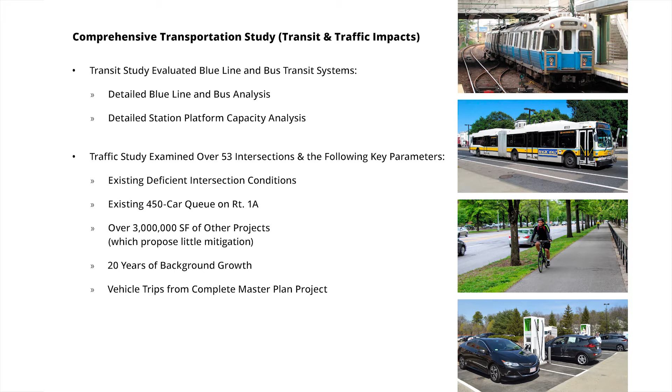All right, getting to the punchline, I'll go through more detail. On the blue line capacity, we studied the most congested part of the corridor between Maverick Station and Aquarium. There's really no point studying Suffolk Downs Station because there's plenty of capacity there—we're more towards the end of the line. So we studied the pinch point. We are within MBTA policy capacity, and well below MBTA crush capacity.

I'll show you, we have some diagrams for that. What we're saying is that we're able to put background growth and all of our passenger trips onto the blue line station and still operate well within policy capacity, or close to it. Remember, half our trips are almost reverse commuter trips too, so that's really good. The orange and red line, typically in peak hour, always operate at crush capacity, if not touching the upper limit. So the blue line's in really good shape.

We're adding a lot of new revenue to the MBTA system without requiring them to put—as we've talked about before—they have a 14 fleet system, but only 12 cars, or 12 train sets, are in service. We add the new revenue without forcing them to put the other 2 train sets into service too. So that's a really good thing for the MBTA—a very net positive for them in the early days.

And obviously we did the platform capacity analysis, so there is sufficient platform capacity both at Beachmont and Suffolk Downs Station, and we'll go through those. As Tom said, we're proposing over $50 million in off-site traffic mitigation measures.

30 intersections are being improved. Some of them are major overhauls, some are more minor updates, but 30 total. The biggest one, as we talked about before, is the Route 1A corridor. It says between Boardman and Winthrop, but it actually goes much farther south than Boardman—it's the approach to Boardman.

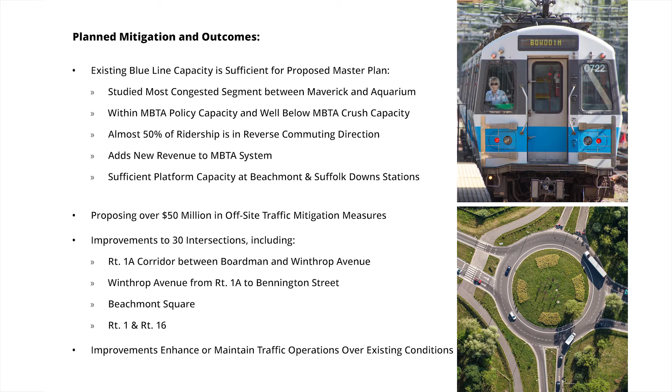So these are other improvements. Just a reminder, our on-site improvements are trying to encourage non-vehicular modes of travel. We showed this slide before, we'll show it again tonight. We're adding almost 5.7 miles of new bicycle facilities just within our site — our cycle track network, our bicycle lanes — and we're talking about at least five new Blue Bike stations spread across the site.

We have two on-site shuttle routes. We're talking about four or five different shuttles that go to places like North Station, the Seaport District, South Station, as well as the commuter rail station in Chelsea. And obviously the extensive on-site community paths and pedestrian ways. Our goal is that we actually do want to push people to the Blue Line — it has capacity, it's the best thing to do, and it reduces traffic. So that's the punchline.

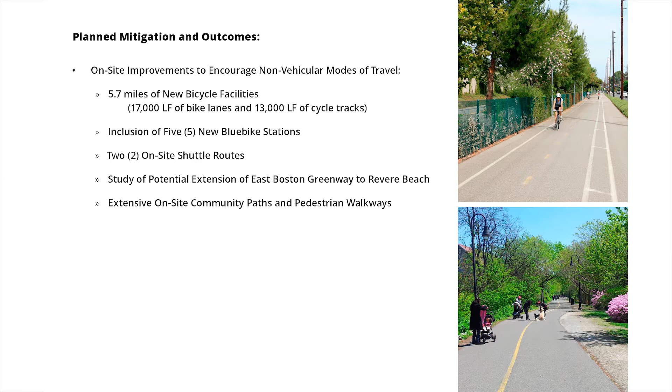So if I go forward — come on, this clicker doesn't like me. There we go.

So again, this is the master plan that you guys have seen — this is just the Revere portion. Now I'm getting back into the details. I might switch sides, I don't know. Come on.

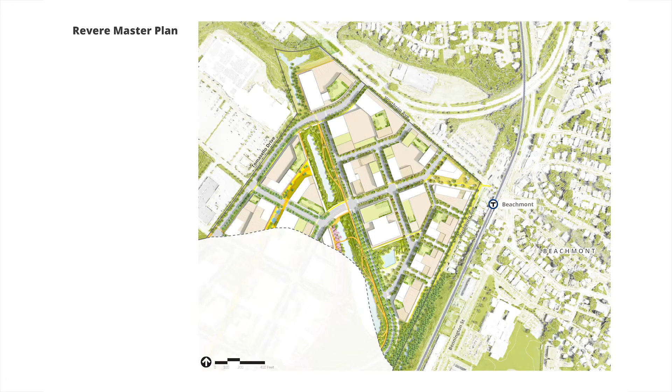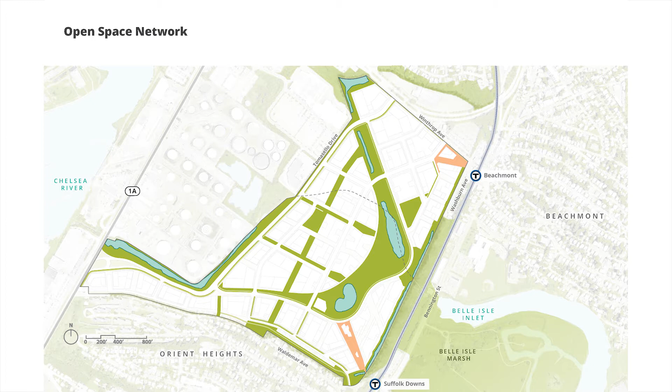So again, I'm showing you the open space system — the only reason is because our on-site roadway network was really formed around the open space system. When we designed this site, we really designed it around the 40 acres of open space system. So here's the roadway network.

Except for portions of Tomasello Drive, which exists today — and some of them, by the way, are not roads, they're just simply asphalt paving that's like 100 feet wide — everything else we have to create on our site. So this whole roadway network is being built by us, and all the utility network is being built by us. As part of the $220 million, we have $110 million worth of on-site costs just to build this out. It's a huge amount of money.

These are really public streets, or public right-of-ways. City of Revere — we're also maintaining these for the City of Revere into the future as well. So a very important point. But here's our roadway network.

Obviously, we're talking about full signalization at Boardman, Tomasello, and Route 1A. It's not on this plan, but we're also talking about full signalization at Furlong Drive and Route 1A. The idea is that our basic concept is to try to shift the traffic back to where it should be, which is on Route 1A.

Doug, before you move from this — it might be worth noting that Tomasello Drive is transferred for virtually its entire alignment, not just at the Winthrop Avenue section. Correct, yeah.

So today, Tomasello actually is more midpoint here — it dives in, and then it comes back to the store, and then goes through here. So the only segment that remains in its current location is here. And that road varies from two lanes in each direction to — well, the width of two lanes, but just wide pavement. But we'll be reconstructing Tomasello really into a city standard street, because today most of it's not city standard — it's just basically paved, goes off into parking lots, or there's Jersey barriers or blocks.

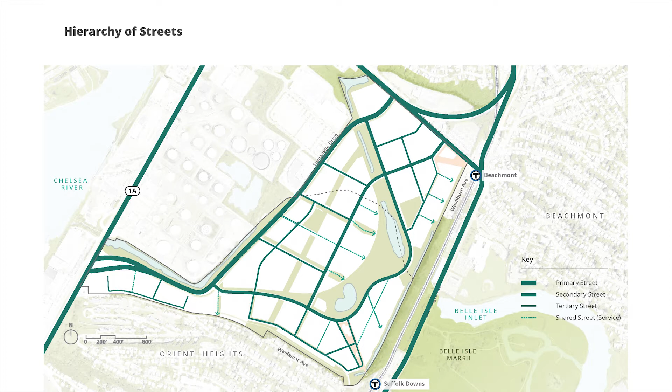So, bicycle network - we talked about this before, but it's still important. The dark blue is the cycle track network, which is a raised two-way cycle path that is not on the street, but up on the curb level, offset from the street typically 4 to 5 feet. It's meant to run all the way through the site, all the way through the park.

We have a new one on Winthrop Avenue, and we purposely connect it back to Walley Street, so it's a very extensive cycle track network. And then you also have the more traditional bike lanes, which are shown in light blue.

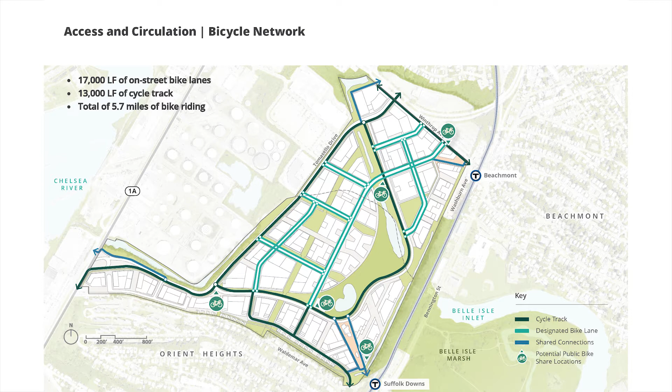You're also seeing the 5 locations of Blue Bikes - we used to call them Hubway, but now Blue Cross Blue Shield owns them, so they're Blue Bikes. They'll probably be Google Bikes in 5 years. There's no host agreement right now with the City of Revere on the Blue Bikes, but we hope there would be. The goal is that we're willing to put them anywhere on the site, and we're open to other dockless bike stations as well.

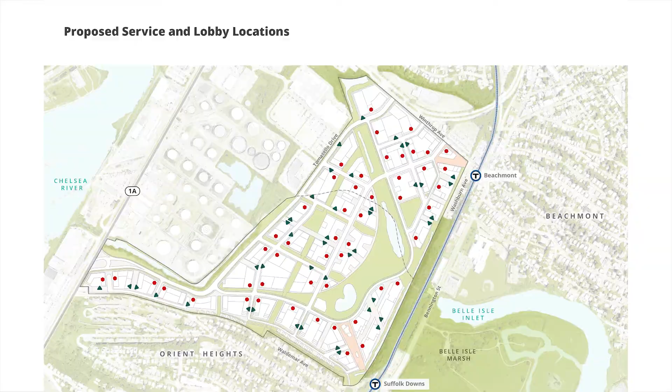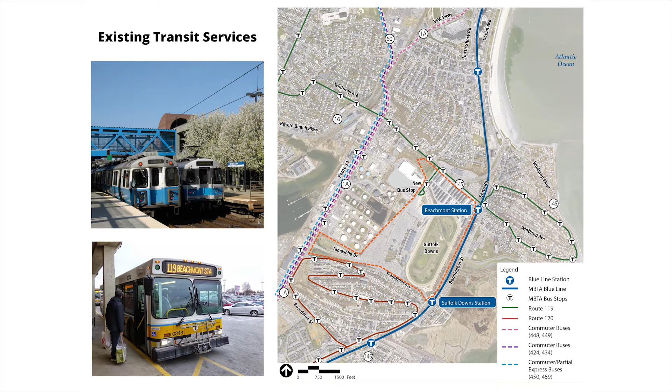One of the things we're working with the MBTA on - as our site gets built out, we'll work with the MBTA and the City of Revere, because that 119 bus may take a further ride into the site and loop back out. For now, the only way in and out is Tomasello, so we have that turnaround there as well. As part of our transportation study, we also studied the impacts on the buses, and I'll go through that.

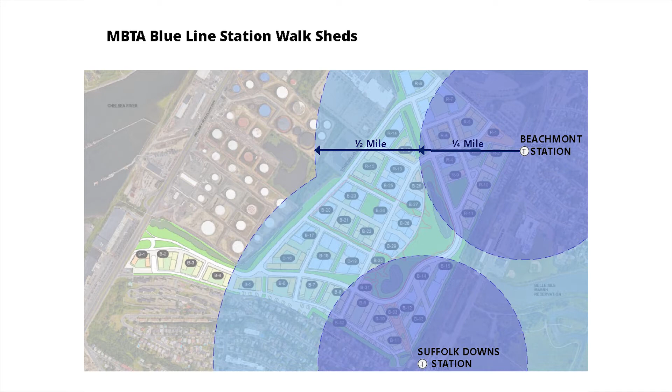Even though we're within walking distance, we're still committed to doing a 2-shuttle route system: an inner shuttle loop and an outer shuttle loop. This is privately maintained and funded by us. We've heard comments from the community about whether they can start making stops off the site too, which is something we'll definitely explore, but we have to think about demand and capacity. Also, the 119 bus does come into the site and leave the site, and the 120 MBTA bus gets really close to our site on the Orient Heights side, so that's a key item.

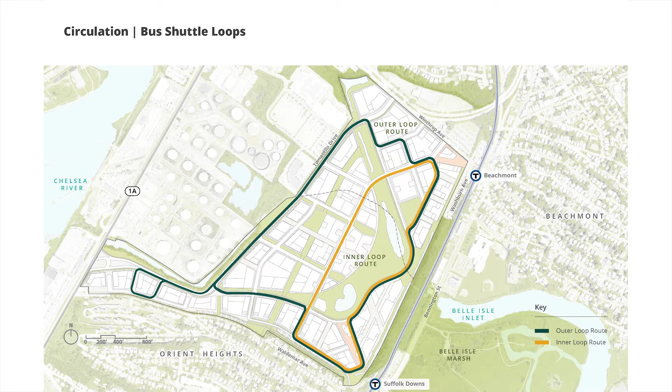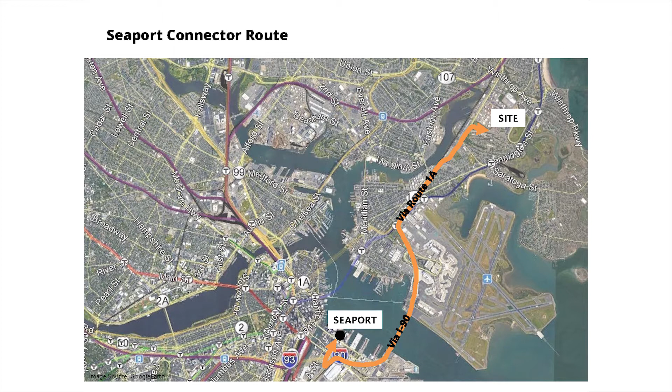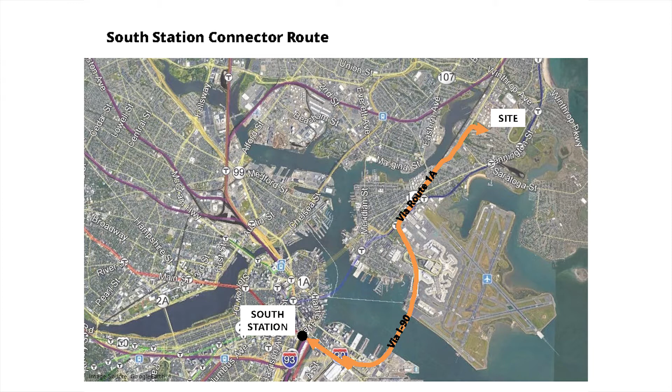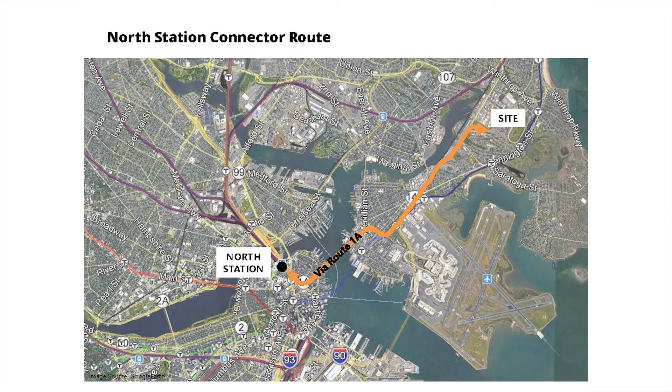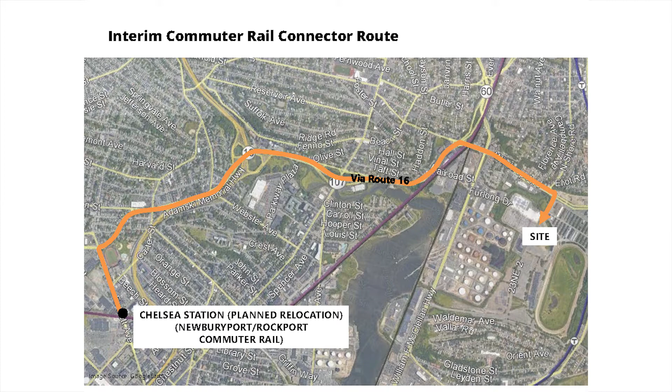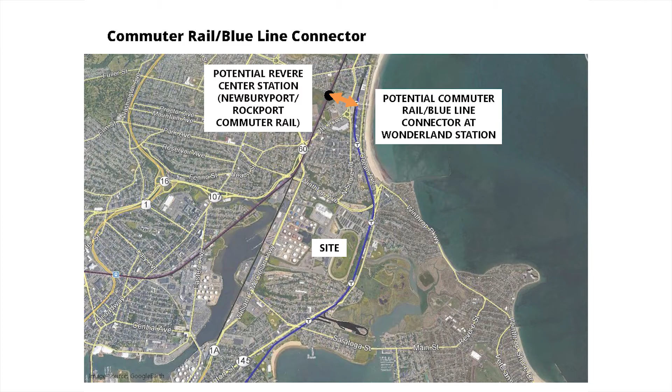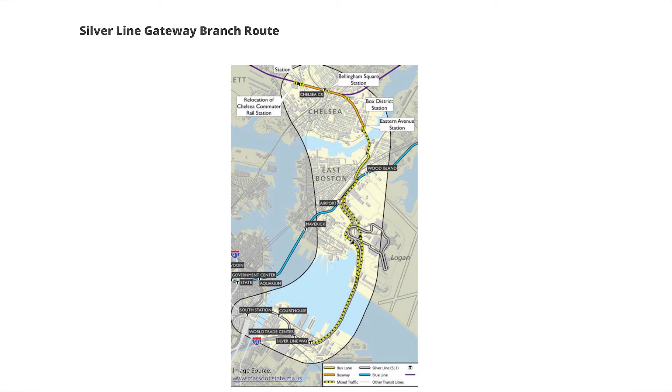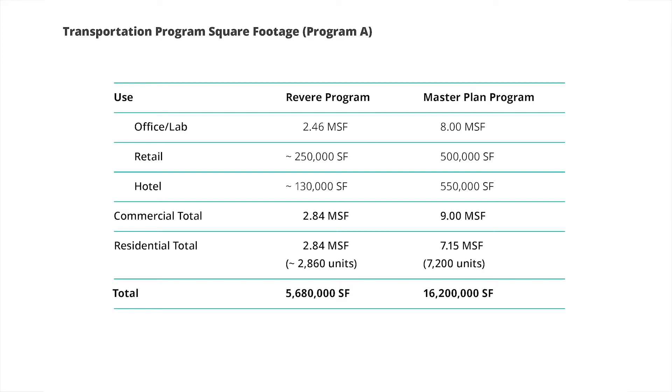So what was the transportation study based upon? I think it's really important to note that we based it upon Program A, the office-intensive program, which generates more vehicular trips than residential. Remember, we had Program A and Program B. Program A was like the Amazon-type program: 8 million square feet of office and lab, 7 million square feet of residential, 500,000 square feet of retail and hotel. Program B was more commercial, only 5.5 million square feet, with residential up to 10,000 units. For the traffic study, we used the more intensive office program, so it's meant to be conservative.

As Tom mentioned, we've been working in detail with MassDOT and MEPA, and they asked us to run the study first using their regional model called CTPS. MassDOT holds this big regional model covering basically everything 495 and in - it's a huge, very car-centric model. In fact, we think it's a very conservative model - I'll look at John, but we have trouble with this model. Still, MassDOT asked us to run it, and the reason I'm pointing it out is that it suggests public transit usage in peak hours is only 25%. That's a shockingly low number for a transit-oriented development site, especially when East Boston is at 50% today. But we still ran it that way.

We also worked with MassDOT to come up with transit-oriented development parameters, so we ran a second model. The reason was twofold: the MBTA was concerned this 25% number was too low to analyze impacts on their system, and we were concerned too. So we ran it with 39% public transit, which is more in keeping with sites like Assembly Row or North Point, more transit-oriented developments. We also looked at other precedents in DC. So you have 2 programs, and the good news - besides our time and John's time - is that you get the worst case of both worlds: the worst case traffic solution and the worst case transit solution. We studied both, and we'll go through those, which I think is really important.

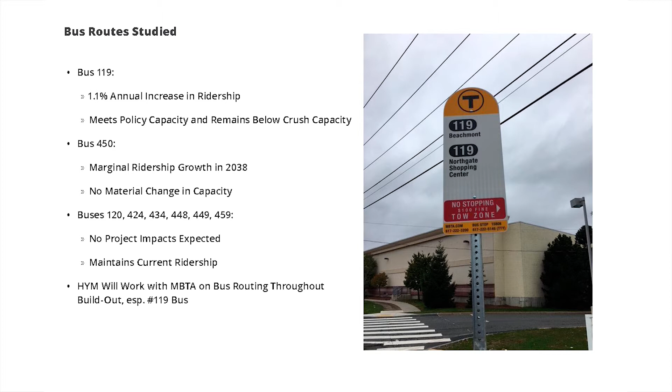And I'm not joking, when we did the Government Center Garage with VHB, the orange line is running consistently well up into the crush capacity during peak hours, and the red line too. That's why they're trying to get new cars to try to bring that down, and new signaling.

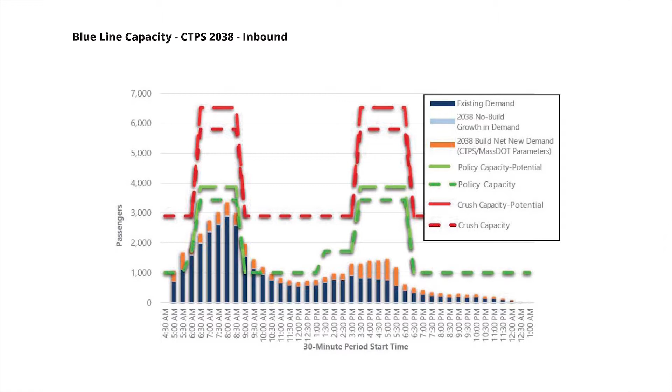And again, this is on the CTPS, so this is less transit riders. That's inbound. Outbound - again, this also shows you the dramatic reverse commute type thing that we have going on. But again, you can see we're well below the policy.

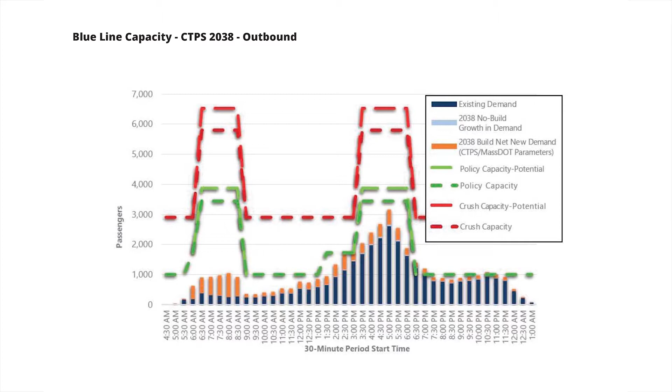Now, when we go to our TOD parameters, you're going to see a jump. So there's the TOD parameters - you do see a jump, and we're starting to get a couple bars that just get over in a 30-minute segment right over that policy capacity, still well within crush capacity.

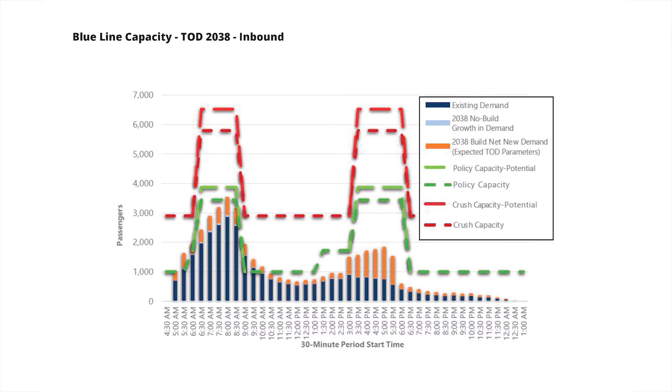And again, you see a little bit bigger jump on the reverse commute. So this, again, is inbound, and here's outbound. That's honestly an amazing story. There's a lot of concerns and questions, particularly in East Boston, because East Boston experiences the Maverick to Aquarium segment pretty intensely. But we thought it was a really incredible outcome.

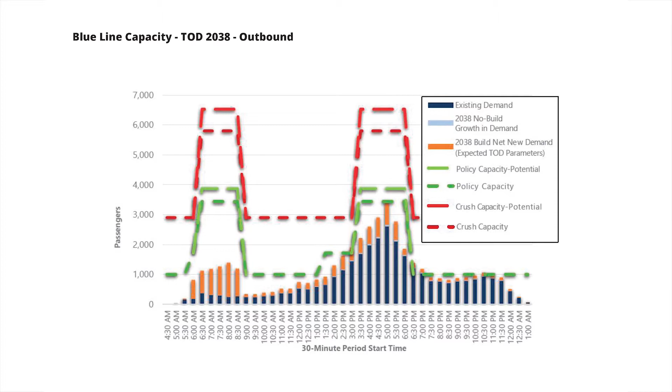And even if we exceed 39% transit ridership, there's still capacity there to be had. So for platform capacity analysis, the platforms were built full length for the trains, so we do not have platform capacity issues either with the CTPS model or with our analysis.

This is not about code changes, though. We're still doing the review of both T stations for code-related upgrades and things like that. So there still will be improvements to these stations. But the answer is that the platforms don't need to be lengthened or expanded.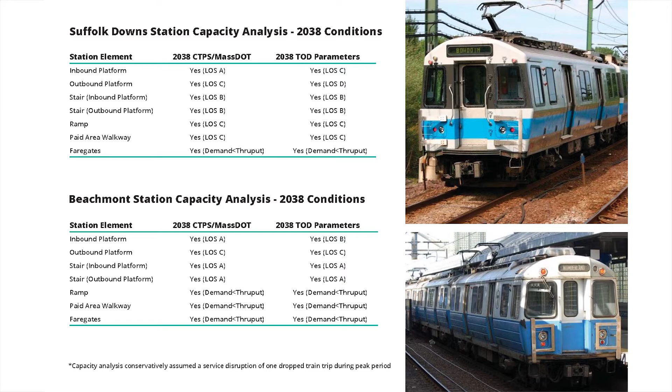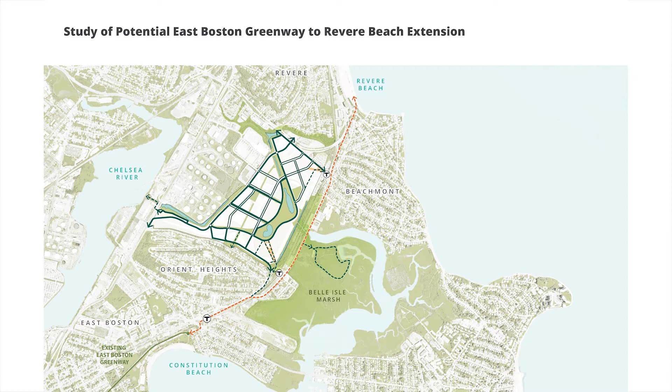So that's really the transportation analysis. The other thing we talked about, which VHB has studied, is kind of bike to the beach - the extension of the East Boston Greenway from Constitution Beach all the way up to Revere Beach. And we did some more detailed studying of that.

Go to the next one. And so the way it looks right now is that here's Constitution Beach. It would really be kind of sidewalk and bicycle connections until we get to Bennington Street. But once we get to Bennington Street, the community path, for the most part, can run in the right-of-way all the way up to Beachmont Square.

And we're doing that partly as a road diet, using the shoulder. But the idea is that we could have a robust community path that gets all the way up to Beachmont Square. It gets a little tight in Beachmont Square - we're actually just talking about this with John today as well, so we're still working how it gets through Beachmont Square. Once we get through Beachmont Square, the idea is to get it up to Elliott.

We obviously know the City of Revere is working on Elliott, so how it wraps around the circle we're still working on. But the good news is that there is very much a viable solution for this Greenway extension to go all the way up. And again, it's more of a regional connector, but it's still very important from our perspective.

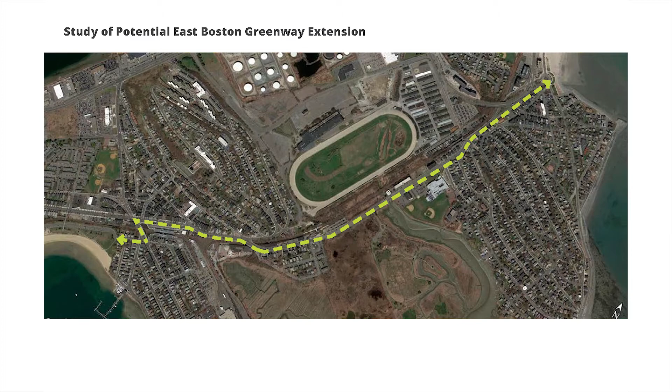All right, so before you get into traffic, maybe we ought to just see if there are any comments or questions on the transit and Greenway issues. You must be very persuasive. Joanne? You can ask questions.

One of the things that Doug had talked about was a 25% transit share during the peak hours. During the rest of the hours, we're at 18.4%, which is very low when you start looking at the East Boston neighborhoods in terms of the 50 to 55% use. So 25% that CTPS has identified was a concession to increase what the model had originally said, but they're still holding us to 18 or 19% daily.

I'll give you the politically correct response we got from some MBTA personnel and planners that we were working with. The answer was, what? That was really their response. So the good news is that they can see the higher demand as well, too.

Oh, sorry, Counselor. Thank you. Will, I don't know if this question was answered, but will the MBTA train stations be responsible for cleaning up their properties? Because right now, Beachmont train station.

That was the MBTA cutting you off, probably. So the answer is, obviously the MBTA should be fully responsible for cleaning their stations. It's something that we can mention to Dina. We can definitely talk to the MBTA about it. These are going to be, just like you guys, this is going to be our front doors. Our MBTA stations want them to be clean. So it's something that we can definitely talk about.

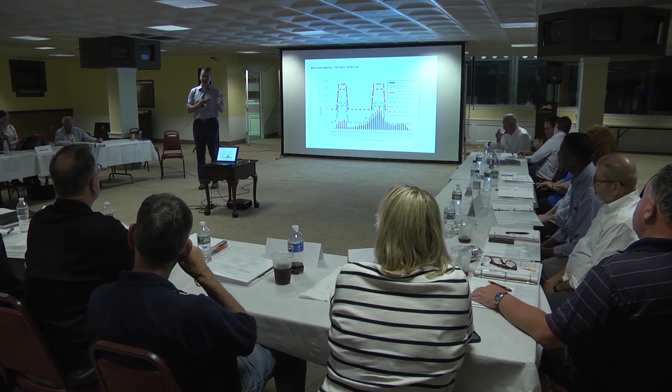This is a relative term. Beachmont's in much better shape than Suffolk Downs Station. Suffolk Downs Station is going to need some real work because it really got passed over, since there wasn't much ridership, so it got skipped. But again, those improvements were still like 15 years ago too.

So, but the answer is yes, we are studying them, and then we'll have to work out with the City of Revere and Boston, as well as the MBTA, what improvements should be done, especially as we build out the site.

Could I ask a question with regard to Suffolk Downs, which is not directly relevant to this discussion, but there's a very long distance along Bennington Street that is kind of impermeable, in part because of the Blue Line tracks. Is there any consideration being given to reconfiguration of Suffolk Downs Station to allow perhaps some intermediate pedestrian crossing, which the station itself could serve, depending on how it's designed?

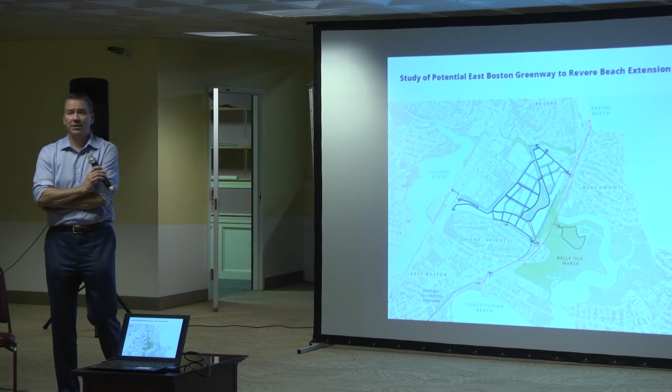Yeah, this has definitely been brought up. I think you can pass over the station without going through the fare gates today. Obviously, that's in very rough shape too - the ramps are spalling and there's things like that. If the MBTA disposes of the parking lot, there may be an opportunity to use a new development to help cross. We did something like this at North Point where we actually used the building and go over a part of our garage to create a new pedestrian pathway. Other than that, it's very challenging, because we talked about this also where Sales Creek crosses under the tracks. The problem is there's no headroom, right? There's not enough room, without scuba diving.

So we have looked at it. The unfortunate part is the amount of infrastructure between us and Bennington Street makes it very difficult. But I do think the goal would be that we definitely don't want to close off the passage that allows people to go up and over the Suffolk Downs T station, because otherwise you have to walk all the way down Walley Street to Bennington to get back over.

So, Ruggles Station, for example, on the Orange Line, I'd be willing to bet you there are more pedestrians that use it between the two portions of the Northeastern campus than transit riders. Yep. So it does serve a pedestrian access issue if there is an opportunity to do that.

No, and again, I think our goal too is that we're going to have residents that are going to want to get to the Belle Isle Marsh or get to Bennington Street sooner, so there are destination points. I think it's something we got to see how the structural conditions come back.

Again, and also, those things from our experience at North Point can be very expensive very fast. And so that's something else that we just need to keep in mind.

Doug, if I could, my first one.

To go back on the T issue that Joanne raised in your response, I guess I want to try and understand, because it sounds like HYM has been having conversations with the T about what needs to be done and trying to convince the T to do the things that they need to do with these stations. Obviously Suffolk Downs is in worse shape than Beachmont, but that doesn't say Beachmont's not in good shape. Yep, correct. So my point in all of this, and the point I've raised before, I guess I'll ask the question - city, state delegation, HYM, working together to put pressure on the T to get these things done. When I look at what happened at Assembly Square and over in Medford and Station Landing, they built 2 new stations. We're asking them to renovate 2 existing stations for a project that's probably just about as big, yeah?

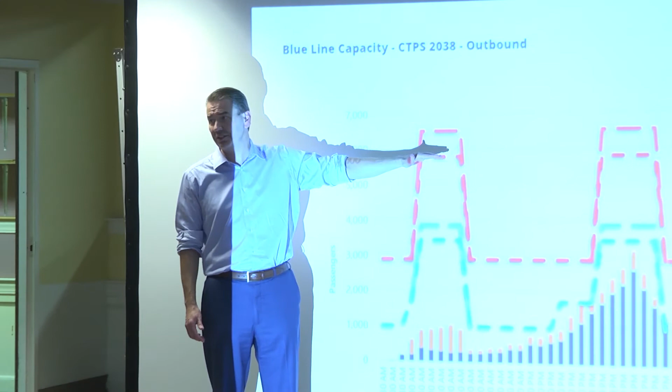So today, again, this crush capacity is already available today, right? So again, this goes back to, so the first 2 lines are what the MBTA is running today. The MBTA operates in the crush capacity. They don't like to, but on the other lines they do run well into the crush. So if you've been on the red line during rush hour, that's crush capacity.

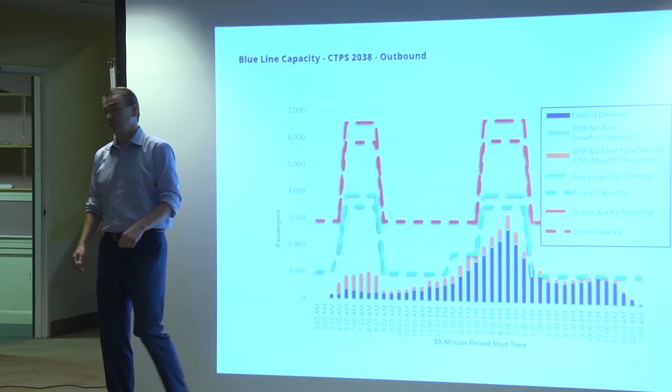And again, this is one segment, right? This is literally the trip from Maverick to Aquarium. People aren't experiencing these peak capacities earlier or after, because as soon as you get past that pinch point, people get off at Aquarium, people get off at State, and they get off at Government Center Garage. So this is a unique point in time. But the first two lines are existing MBTA operations. The second two lines, the higher lines, are when signal improvements are made so they can put the other two train cars into service and get to 4-minute headways. So that's what we have, and that's in the report as well.

Also, maybe piggybacking off of this question too, Wonderland is also a designated TOD, and there's quite a number of developments happening there. Is there a way we can also see comparisons of ridership numbers there, and also the pinch point that's being measured because of the increased ridership at Wonderland, not just from the new development but also for the North Shore as a connecting point into Boston? So is there something we can also look at?

Perhaps I could address that in part. As Doug noted, all of those projects at Waterfront Square and elsewhere along the boulevard are already factored into these numbers. But the indications are that the transit usage out of Waterfront Square is quite comparable to Boston, 50% or more. So it's a very high level of transit use, probably higher than what is projected in this model. But I think there is enough white space there to suggest available capacity before we run into any real problems. Thank you.

And then my last question, has this site also been designated a TOD? And if so, has there been a health impact assessment conducted? So we are a TOD, but I don't think we've been designated as a TOD site, so I don't think we've done a health impact assessment. We can talk about that afterwards too. That's a new term for me. So happy to talk about that.

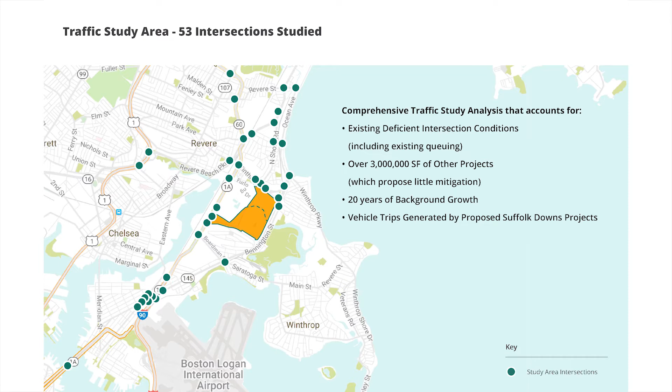Again, we already kind of did the final chapter, but 53 intersections. We talked about what's included in the traffic study, so a pretty extensive traffic study. And again, we're studying it two ways, under CTPS parameters and under TOD parameters. We also study it at 2028 and 2038, because we're building out part of our site. So the idea is to give the state and the cities a way to look at what happens in 10 years, and then what happens in 20 years, so they can kind of see. Our gut is that there could be big changes. We think this is a very conservative model.

There could be continuing decline in car ownership, there could be increased—there's a lot of other factors that are going to happen in the 20 years, but again, we tend to be conservative.

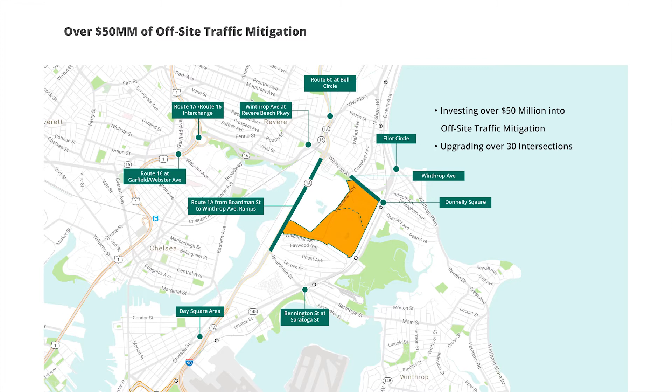This shows you where the $50 million of off-site traffic mitigation is going. We're not going to go through all these intersections, but the big ones are Route 1A reconstruction, Winthrop Avenue reconstruction, Route 16 and Route 1 interchange, which we'll talk about. And then we're looking at a lot of the intersections as we go up the Route 60 corridor as well. So very important there—over 30 intersections.

One of the other things we did—I don't want to say it's because of lack of investment by the state, but since these intersections have not been touched in a long period of time, 17 of these intersections exceed the state average for crash ratio, which, from ever doing a traffic study before, I don't think we've ever had this many intersections exceed. Then again, we've never done 53 either.

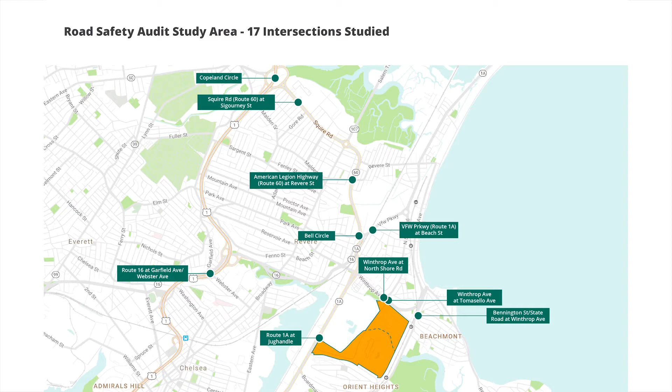That means we, with the City of Revere, MassDOT, DCR, East Boston, depending on which intersection was whose jurisdiction, did site walks for every single one of these and did a road safety audit—to detail why are the crashes happening, where are they happening, what's the angle, and are there improvements we can incorporate into what VHB is doing for mitigation. So it was part of the comprehensive study. This will also be included as an exhibit into the submission of the City of Revere, but it's in the DEIR.

So again, this is the first major improvement, the major reconstruction of Route 1A, basically from all the way down below Boardman Street, all the way up to Winthrop Avenue. Today this is 2 lanes in each direction. We're going to go to 3 lanes in each direction, and we're doing it by cannibalizing the grass median that exists in the middle of the street. It basically increases the capacity from 2,100 vehicles in each direction to 3,300 vehicles in each direction.

We also add in 2 new bus pull-offs, because we have a series of regional buses running through the corridor. We're putting a bus pull-off on our property here, and hopefully a bus pull-off on Massport property across, which will allow some of these buses to get out of the travel lane, pick up people, drop them off, and then continue to move, which is really important.

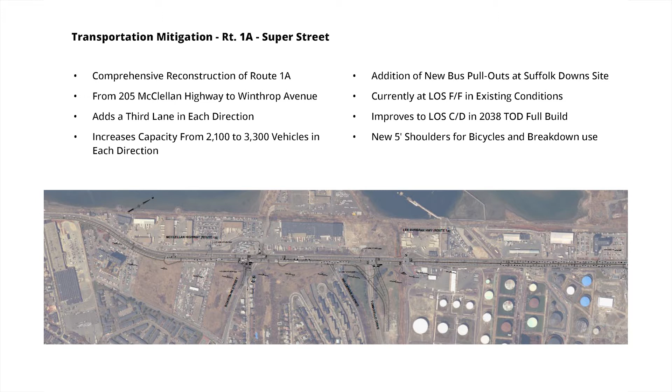Currently at Boardman and Route 1A, it operates as a level of service F in both directions. At full build, we're at a level of service C and D at our TOD full build. We're also still incorporating 5-foot shoulders for bicycles and breakdown use. It's a very limited right-of-way corridor, so we're balancing what MassDOT's priorities are—they want bicycles to be able to use it if they want, but they also need to have breakdown lanes as well. That's something we've worked on with them.

I'm going to turn it over to John here so we can start to go through this, because it starts to get into the more detailed design. But one of the key things is that the reason the corridor starts to work really well is that we're changing from a 4-phase operation at the intersections to a 2-phase operation.

But on that note, I'm in dangerous territory—I'm going to give it to John. Thanks, Doug. I don't have to bail you out.

Doug, before you turn it over to John, I have one question on what you mentioned about it being at an F right now—it's going to be at a C and D level. Yep, so it's an improvement, but there's still room for more improvement. My only question, and maybe you'll address it John, is that this is $50 million of improvements that HYM is undertaking, correct?

Where is the state in all of this, and how much are they contributing to maybe take that C to a B, and so forth? So, I would say two things.

The state, we've met with District 4, we met with Secretary Pollack, we met with the Highway Division, going through all of these. MassDOT is doing other improvements. They're doing some improvements right now on Copeland Circle. So they do have their own capital plan as well.

I think the good thing for us is that we're identifying a lot of items that has really drawn their attention to this corridor. Because to be honest, MassDOT has not done, unless they have to, a comprehensive study of the corridor. So I think for the first time they have the information like you guys have, which is now they suddenly see it. We're trying to address the major bottlenecks, particularly the areas where we're adding most of our traffic to. As we get further away from our site, our traffic starts to go down, but some of that will be there.

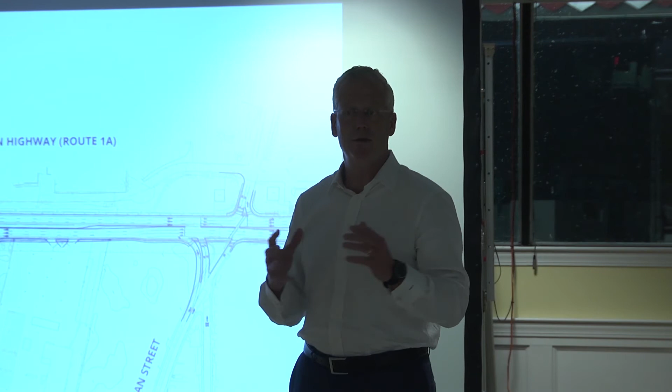Oh, I'm sure there is. When we meet with the state, when we go through these issues, we get resistance. And the resistance, a sympathetic ear for me, I think the resistance is they're anxious that they don't have enough resources, they're anxious that they've not been able to hire enough staff, they're anxious about a lot of different fronts. But I'm just going to say it, after 4 years, you've got to have figured out what you want for revenue, you've got to have figured out who you can hire, you've got to do all those things, and we all need to work collectively. This is a huge issue.

Exactly. And it's true not just for us on this corridor, it's true throughout the whole region. And it hasn't come up at all in the current campaign season, not one time. And we should all work together on these things, and we should overcome the resistance, and we need to make sure that people understand it's time to make these improvements. And we're happy to do our share, but part of what we anticipate is we might get some pushback from these folks, but these are changes that need to be made, and we need to all work together to make these happen.

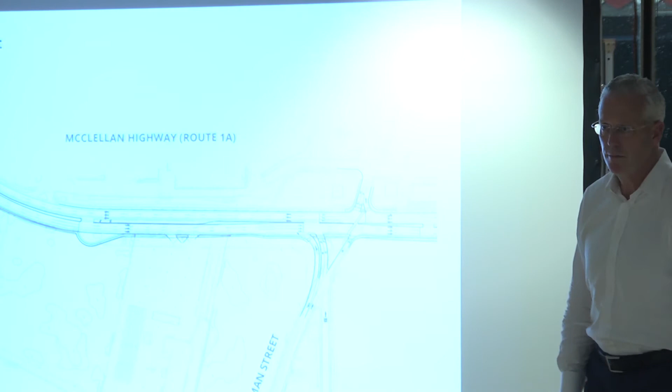Just to reiterate, the solution to the Route 1 North issue has been on the table for many years. We've gotten the same resistance you've been sensing. What we're hoping is that adding HYM to the mix will create a critical mass to get the political support we need to do things we've all known needed to be done. We have Beta Engineering working with us on those issues.

I think bringing HYM on board, beyond the $50 million you spend, is politically significant. We really now have a champion that has credibility and political influence that can make this all happen. So we couldn't agree more.

Okay, thank you. I'm just going to run through some of our detailed level improvements quickly.

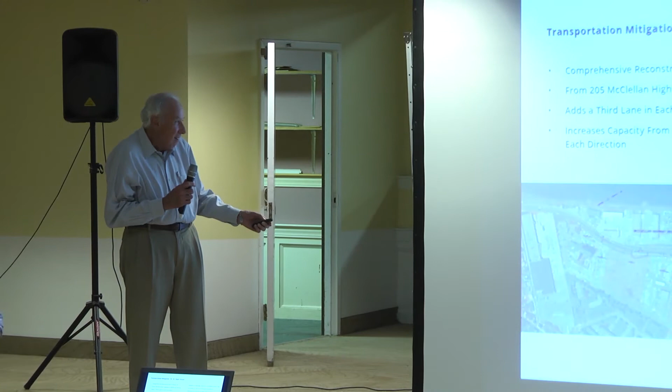I'll start with the Route 1A corridor in Boston, essentially by the Marriott Hotel. It starts around the Marriott courtyard, and we start to add a third lane, and we're into a full third lane mode by the end of the Marriott property line. That third lane northbound continues all the way up to Winthrop Avenue. In some cases, the southbound traffic is always carried in at least 3 lanes from Winthrop Avenue. I'll show that in a minute. But there are areas where it's 4 lanes, where we're providing a left turn or turnaround lane.

The basic concept here is part of a federal highway initiative, one of their design initiatives they try to push across the country. It's called Michigan Lefts, displaced left turns, any number of things. The way it works is, as Doug mentioned, traffic signals work in phases. Main Street is phase 1, side street is phase 2. Sometimes you add a left turn lane, that makes phase 3. Sometimes you split or do something with the side street crossing, that becomes phase 4. For each phase added, capacity gets reduced by about 10%. So the idea is we're trying to take Boardman Street down from a 4-phase signal today to 2 phases, and adding the lane, which is why we can say we're increasing capacity from 2,100 to 3,300 vehicles per hour per direction.

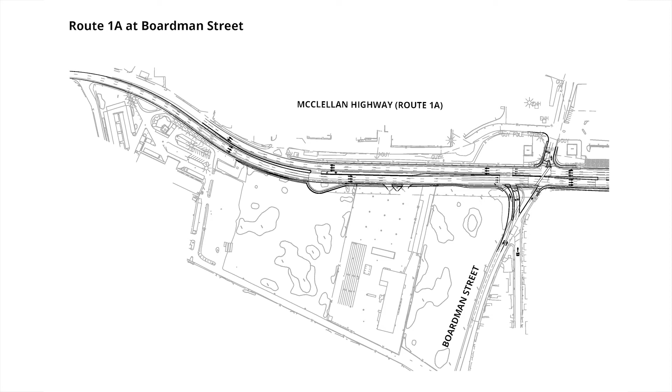Speaking of that, this is the U-turn for the movement from Boardman Street. It's going to mix with site traffic, come back and make that U-turn to get to Boardman Street.

We're also providing another U-turn lane between Waldemar and Boardman for site-related traffic, trying to keep them on the regional system. We don't want to send them all the way through Boardman because we're going to start overloading that last U-turn lane. So we're going to put another U-turn lane in, this one only for passenger vehicles.

So the U-turn is here. It will be under signal control as part of a coordinated system, and we've proven that we're going to get 3,000 to 3,300 vehicles in each direction through this coordinated system.

But the other part of this - anybody headed to the backside, to Waldemar Avenue - doesn't even have to deal with the lower turnaround or with the Boardman Street thing. They're going to have direct access via this U-turn lane to come back into Waldemar.

The side driveway itself opens up from the 2-lane configuration to 4 at the intersection, with 2 right turns and 2 left turns. Again, we're trying to keep the amount of time given to the side driveway no longer than the time that's provided for pedestrians to cross the street. That is our basic gauge in how this 2-phase operation has to work.

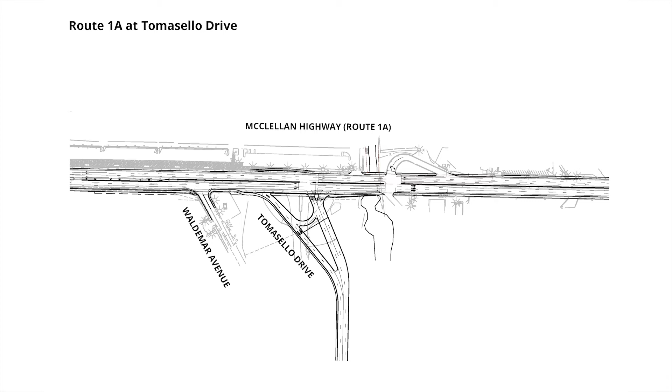The jug handle, no changes except 3 lanes in each direction. That will be integrated too. Yes, everything is coordinated - every signal, the turnarounds and everything else, everything will be coordinated. So somebody who makes it through the jug handle signal at the south end is going to be progressed all the way through Winthrop Ave, or all the way through Furlong Drive at the north end.

Same thing in the morning. Somebody who passes Furlong Drive is going to be progressed all the way through the system. The last few vehicles may not make it. The first few vehicles may be delayed a little bit as they approach something because the queue in front of them hasn't started to move. But again, it's all progression.

At Furlong Drive, we're going to break the median. 2-phase operation again, no direct left turn from Route 1 southbound.

There's no direct left turn from 1A southbound into the site. Those vehicles have to use the jug handle to come back.

One of the best parts of this design is this on-ramp from Winthrop Avenue. I'm sure many people experience it daily. Today, traffic on that ramp has to merge with the 2 lanes on Route 1A southbound. Under this design, they're entering their own lane, and they stay in their own lane all the way up to the Marriott, or they can change lanes if they want.

They're not going to be forced to merge under yield sign control or anything else. We have to end the 3rd lane at some point northbound, and that will be at the Winthrop Avenue off-ramp. So there'll be a lot of mixing that goes on with traffic in this area from the jug handle down, with people moving over and concentrating in 2 lanes so they can get up over the bridge. But that's the super street.

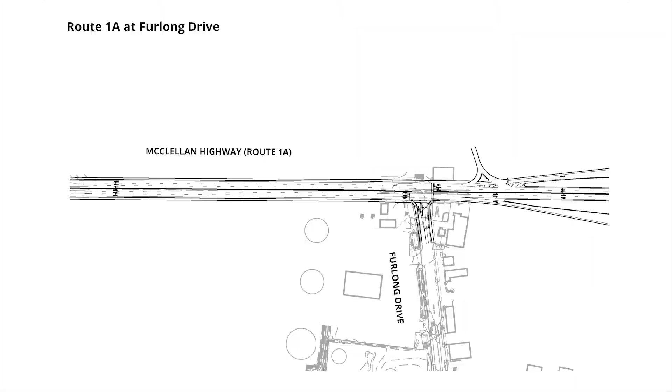Winthrop Avenue, a couple of things on this. I think we were here last time and heard some comments. You now see a median break in front of the fire station to allow vehicles out without going down to North Shore Road and making a U-turn. At North Shore Road, we are looking to eliminate a delta island and pull traffic a little farther away from the Sales Creek crossing. This is part of our idea that downplays local streets, and we consider North Shore Road a local street in this case because of the development density and the speeds, even though it's a state-controlled roadway.

Knowing that we want this intersection to work because of the location compared to Tomasello Drive and the actual spacing in the corridor, we're opening up North Shore Road to provide a second left turn lane. We don't have to widen the road, we're just going to use the medians we're taking out and some of that space to get that second lane. It'll store a total of 8 vehicles without blocking the right turn movement, which is the much heavier movement.

Tomasello Drive is shown in its new location. It's being shifted about 185 feet from its current location, moving over.

Because of the left turn volume that is existing and what we're going to be adding, we've added 2 left turn lanes coming in from Revere Beach Parkway westbound. We've got 2 receiving lanes into the site, and we're maintaining 3 lanes on the outbound roadway. Based on a traffic monitoring program, as development continues, we're identifying the possible addition of a second right turn lane within the environmental documents in case it has to be done later on.

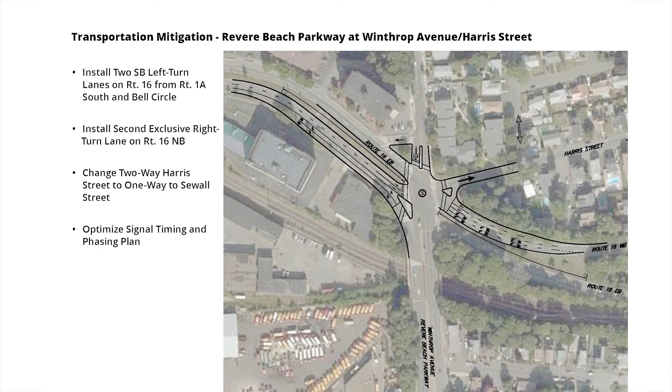It's not the intent. And I'm glad you mentioned that two-lane right turn coming northbound on the Parkway onto Winthrop Ave. That's been a bone of contention from all the city councilors on the red light and the stop—it's only a 10-second stop to allow the Winthrop Ave cars to come up. But now that you're making it two lanes, you need the red light; it's almost necessary for that delay.

If we can go back one more to Tomasello and North Shore Road, please. Two things—Campbell Ave, to the left. What are those markings there? What kind of work is being done there?

That's because we're going to be breaking the median. And we want to enforce the idea that Campbell Ave is still only going to be able to turn right, even with the broken median. The broken median is for the fire department, and as part of this we'll probably be looking at some kind of mountable curb with edging to make it look like an extension of the median, but designed so the fire department can access it.

Are you going to close Campbell Ave down to the width it's at now, and make them take the right, rather than have it as wide as it is now—probably about 50 feet? So you're going to close that in? Close Winthrop Ave, or close Revere Beach Parkway at that point, or close Campbell Ave, right there? Yeah, because that used to be—one time Campbell Ave used to be a one-way going the other way. And that's why you have that wide mouth there. So I don't know if you're going to cut it down and make them go right.

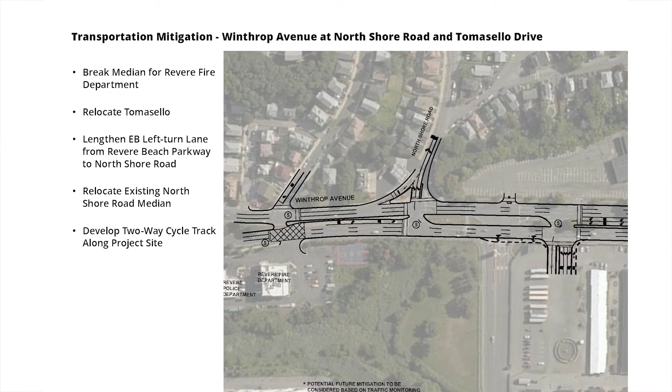John and Doug, it occurs to me that it would be very helpful to superimpose on this some chronology. When you are planning to do these things, and if they're not all being done simultaneously, in what sequence they would be done. I think it would give people a better chance to understand not only what we would expect to happen and when, but how we could acclimate to these various changes. You mentioned an iterative process. At what point do we decide whether to move forward as planned or to change? So some chronology would be very helpful, just as you've phased the development.

We've got a small footnote at the bottom of the plan talking about the second lanes. We don't see the second lanes being needed before 2028. And if they are needed, that's our post-2028 construction. The intent is to have all of this mitigation built and in place by 2028, probably sooner, with the added things being very limited. Again, I talked about 2 intersections. Having said that, I assume some of the things are going to be done first, probably before the development, and others will be done subsequent. Correct. It'd be helpful to know what that looks like.

So just to go over it, Winthrop Avenue reconstruction is going to be part of Phase 1R, right? And John's going to keep going through the rest of the corridor. By the way, I think that section is actually correct, yes. In my mind, I'm characterizing Revere Beach Parkway and Winthrop as the corridor that people move through.

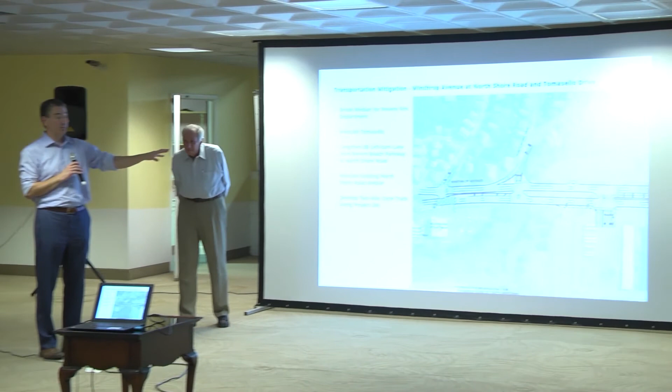Winthrop Avenue is a 50-foot right-of-way on the side of the corridor. Revere Beach Parkway and Winthrop Avenue, yeah, that's common parlance. I think the idea is that this section of Revere Beach Parkway and the Winthrop Avenue sections you're going to see are Phase 1R. The Route 1A Super Street is really towards Phase 2, right? It's a major reconstruction, right? And we're going to need time to design it and get through it too. So we would end up probably with 2 phases, Phase 1R and 1B going forward.

And then the reconstruction happens of Route 1A as we get into Phase 2 of the project. Just a word of caution.

You're improving Winthrop Avenue, Revere Beach Parkway, which makes it a more attractive route than it is today. You're not improving Route 1A until Phase 2, which means the local streets will become more attractive while the regional roadways will not. From Revere's perspective, the reverse would be much preferable - make the regional highway attractive to keep people off the streets. In a way, advertently or inadvertently, this reverses that. So for some interim period, we're going to have a lot more traffic on Winthrop Avenue in the short run than hopefully we will have in the long run. I just identify that as an issue that needs to be acknowledged and hopefully addressed.

I agree, and one of the things we're talking about is going to the state and breaking the median at Furlong to allow left turns out in Phase 1R, to support the Revere side and get traffic out without going to Winthrop Avenue. Big move in the right direction.

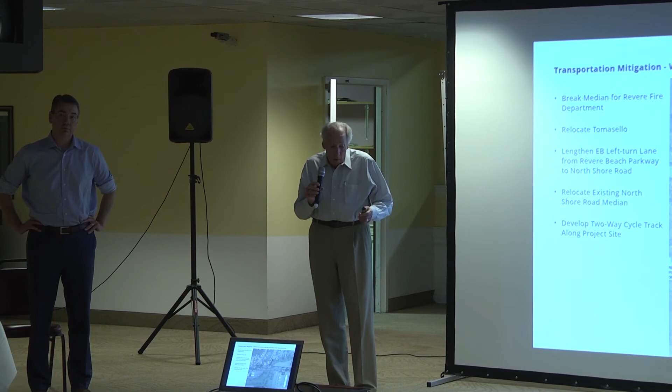That was my primary question when looking at all the changes. I was going to ask the same thing - chronology. At what point in time is this taking place? Because Phase 2 is how long down the road - after 5 years, right? Well, yeah, so 5 years is a long time.

But the break in Furlong Drive would happen with Phase 1. Yeah, and when Doug talks about that, you'll see construction on 1A long before that 5 years, because it has to be in place to support a certain level of development, and it's got to be open to support that level of development.

Just to make sure what you're saying, my primary concern going back to the timing of all these things is that we're doing Phase 1 in Revere, there's Phase 1 in Boston, there's going to be increased traffic as that's all being developed. Are you saying all the improvements are being made in time to support that increased traffic, or are we going to be dealing with bottlenecks and problems until 5 years down the road when some of these things get implemented? Because that doesn't sound good.

I think we are understanding how the development is happening and the phasing of the development itself. Phase 1 Revere has got 2 primary access points - pretty much Tomasello Drive and then the Winthrop Avenue corridor. The Winthrop Avenue corridor is narrow.

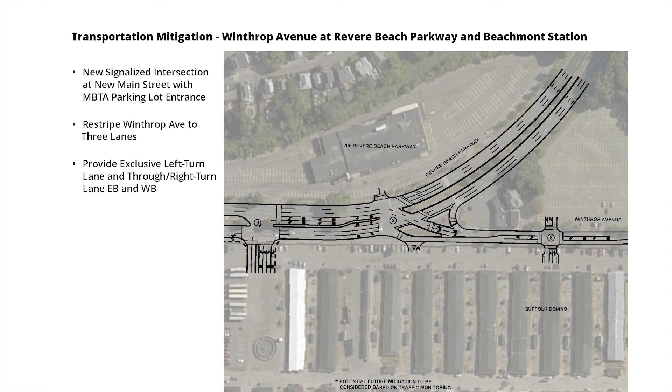My primary concern is the right turns out of that exit into Beachmont Square, and the additional traffic there. That's probably where you're going to go next. I just wanted to bring that up in conjunction with this. Thank you.

We are looking at the movement on, well first off, we're very constrained with what we can do on Winthrop Avenue, as everybody knows. I don't want to advance that one too quick. We're dealing with 3 lanes available under the blue line. We can't do anything better than that.

So the first thing we're going to do is get rid of the bus stop that's here and move it out to the other side of Washburn. And we're going to do the same thing on the other side with a bus stop heading the other direction into the MBTA parking lot. Again, that makes sure that the 3 lanes are available for traffic to move, with a right turn lane that's there. The other thing we're doing within Beachmont Square is to...

Extend the median that is on Bennington Street across to restrict access into the Dunkin' Donuts parking lot. I hate to say this, this is the only intersection I've seen, the only median I saw, and I don't think the signs are there, but it had a 'left lane must turn left' and a 'no left turn' sign together on the same post.

People do both. So this essentially tries to free up some capacity and eliminate some confusion with movement to and from the Dunkin' Donuts right at that point.

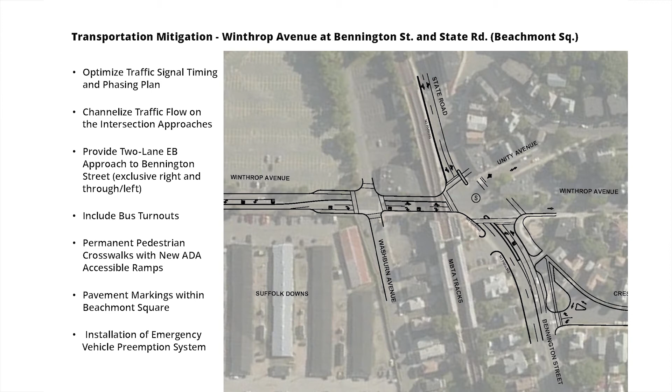So that's it for Beachmont. Okay, now Bell Circle.

Don't get scared. This proposal for Bell Circle grew out of our discussions here last time when the police chief was talking about wanting a signal on Beach Street in the Rotary because that's messing things up. And I heard comments about what are we going to do with Everett Street - people coming out of Everett Street and cutting across, taking lanes and blocking stuff, messing up the intersection. So that's where I started.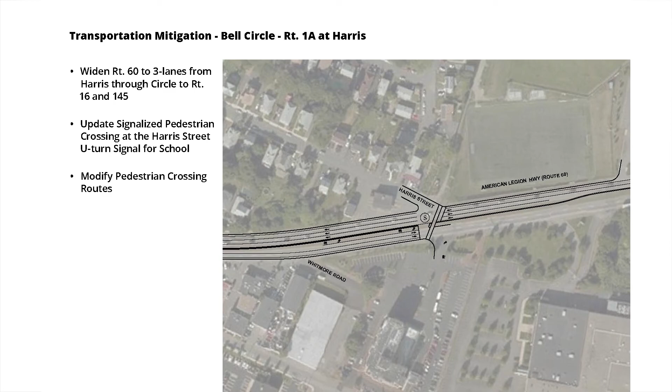Can you go back up to the slide before, when you show all of Bell Circle? We're a little concerned about the high school kids that cross the street, because we've observed it ourselves. So if you're at Shirley Ave, what pedestrian accommodations are you going to put so kids can get across American Legion Highway and down to the other side, then walk down to that proposed crosswalk?

First thing, we're going to eliminate the crossing in the middle of the circle as the only pedestrian facility in the intersection. That's going away. There'll be pedestrian crossings placed on the east side of the circle, across Route 60 at that point. There'll be a direct crossing that runs with conflicting traffic during the phase handling the 1A continuation movement, so folks turning right will have to yield to pedestrians in the lower part of the crosswalk. We're also providing a crossing on the other side of the corridor to take people into the traffic circle itself, with a crosswalk at that point, so anyone who wants can come down, cross, and cross again to come back into the area.

For folks coming off Harris Street or Beach Street, we'll be putting crosswalks on the outer side, the south side of the circle, to handle the Harris Street demand coming into the area. So right now, a lot of kids, because the current crossing system is so far out of the way, have to walk all the way up to the middle of the circle. So it looks like it's just moving one of the crosswalks down a little bit, but they're still going to have to walk up a bit from Shirley Ave and cross over.

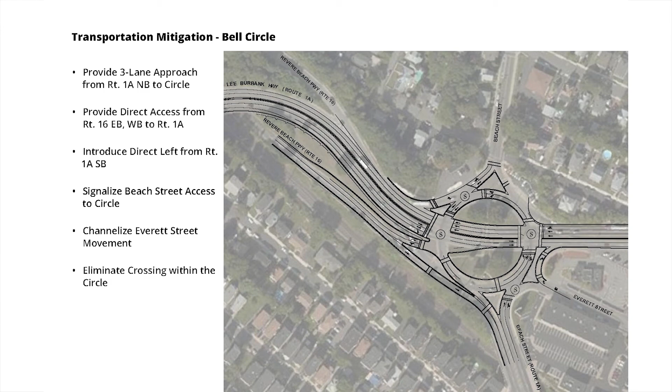One more thing - when you're extending Route 60, are you taking the sidewalk off by the wall? We're not, we're holding the existing curb line. So the sidewalk will still exist by the wall? Yes, even though it's relatively narrow, it's going to stay there.

I think the best improvement here is trying to get an option for the high school kids to cross earlier at a signalized intersection, so they're not doing what they do today - walking on the crosswalk until traffic breaks, crossing into the median, walking in the median, really creating their own path of traffic. The idea is there'll be crosswalks at both intersections now, much more signed and appropriately done. The grass median there today will be replaced with a concrete barrier because we need the width, and the median and its offsets can't take up more than 4 feet, versus the existing median that's about 10 or 12 feet wide.

Route 16 - last time I came here, I had one option, maybe two options. We've changed because we've done some analysis based on the 2038 numbers, and the change we've gone to is, well, first off, Route 1 and 16 is an incomplete interchange.

There are 3 missing movements from the Route 1 corridor to the Route 16 corridor. We want to try to address these 3 missing moves as we go through this.

We originally started with an off-ramp from Route 1 southbound to Route 16 eastbound. That was the first component identified as needed. Then a movement from Route 1 northbound to Route 16 westbound that can only be achieved in this area, given the way the highway takes off and runs at a 4% grade. We'd never be able to build a ramp within the right-of-way.

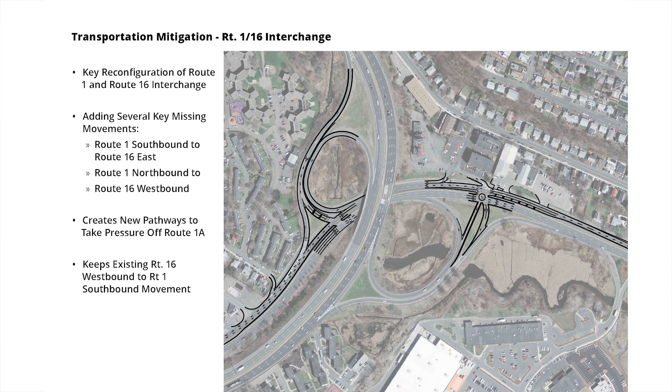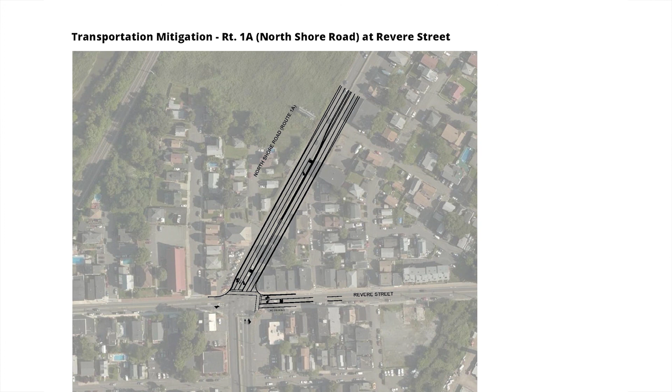We don't really want to control traffic on the northbound side of 1A, as the engine itself can handle that.

Any questions? Good, I'm getting out of this one quick. Next up is one that I might not get out so quick.

After the last meeting, I talked with the chief about this one - I won't take his name in vain, but I talked to him and bounced some ideas off of him.

On Route 60 today, the left turn demand to Revere Street is close to 500 vehicles. The left turn lane is 500 to 600 feet long, so people generally don't spill out of it - it's been lengthened to manage things. But this takes time away from everything else wanting to happen here, including the pedestrian phase, which is a school crossing for us since the charter school is a little bit up the street.

So what we've proposed is to break the median at Breed Street, put a signal in, and allow left turns down to Revere Street, which loops around, allowing left turns back at that point.

Actually, the ideal point was back at Hutchinson. The left turn used to be right there, then there was a triple fatal that led to closure of the medians. The concept, rather than closing the intersection, would have been to put signals back through there to control the left turn at that point - we're only controlling the left turn, not the through movement headed southbound in this case.

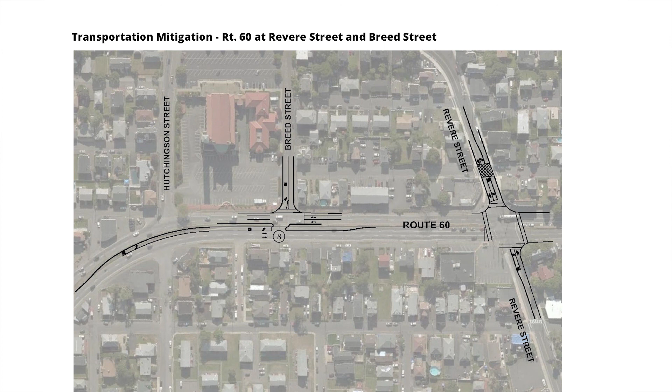Will there be a signal under this arrangement at Breed and Revere? No, the demand won't warrant it because we're taking so much traffic off of Revere Street.

Brown Circle. It helps to have the chief's endorsement. I told him if there was ever a public hearing or meeting in the area, he had to come.

Again, this is the same thing we've been carrying for a long time, Bell Circle. MassDOT is very close to issuing guidelines on how it should be striped, but it is a major traffic circle. We're not going to try to do anything to it, because while it may not be working that well, there's nothing that's going to work much better than it.

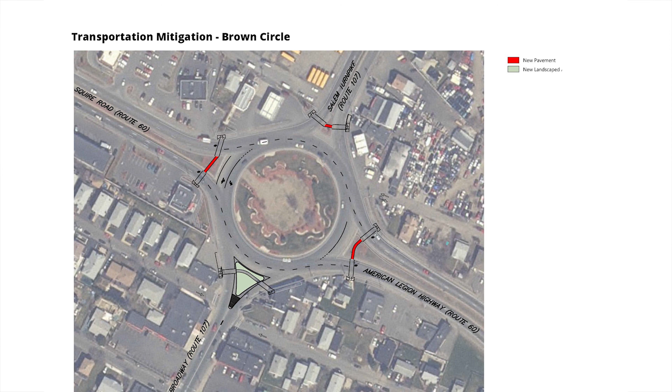And that's it. You can finish if you'd like.

Going back, the traffic study was submitted with the DEIR, as well as what will be with the Revere Special Permit submission. There are a lot more intersections addressed in detail, with detailed level of service tables.

And I do want to go back to Bell Circle. Bell Circle is actually a series of intersections that all work together. So, what John was referencing on the CTPS numbers, we're hovering at similar conditions. The TOD numbers show certain movements that do improve above a level of service F. But again, Bell Circle is a highly complicated intersection with several series of intersections that go through it.

I just want to be clear about that, and give you a sense that it's a very comprehensive study. There are a lot of other intersections that have been addressed, and some that weren't, but some of those are actually being currently studied by the city in their Ocean Boulevard and Revere Beach Boulevard study as well. Some of those things will come out and we'll be talking about them in more detail as we go through it.

Again, this is just the summary. We've been here a long time, we're already past our closing time, so I don't want to reiterate it. But the good news is that we are making major improvements, improving capacities, either improving level of service or maintaining it. We're going to shoot higher. But definitely not a blue line issue, not a bus line issue. $50 million of off-site traffic mitigation measures.

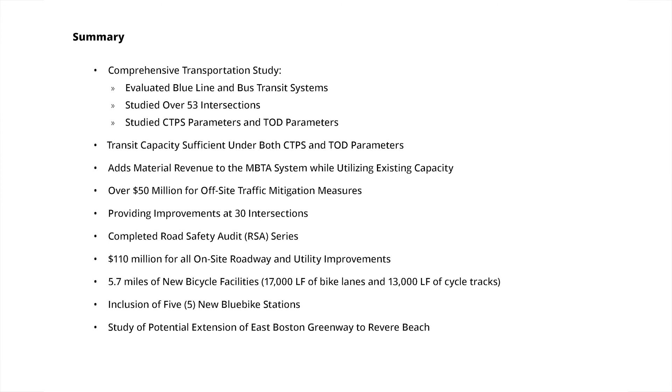So, if there are no other comments or questions, as you said, we have gone over time, but well worth it, I think, for this purpose.

Danny: I didn't hear much talk about casino traffic. It's the casino which is opening in June, and we're the only surrounding community with no mitigation agreement. But I believe Mayor Arrigo could rectify this problem. I believe you can go before the Mass Gaming Commission and say your community is suffering from traffic caused by the casino. Could that be an avenue of money? Could you lead that voice?

Yeah, I will. First of all, pursuing a neighborhood agreement is well worth doing. It was probably complicated by suits involving the Suffolk Downs site, et cetera. But beyond that, the Mass Gaming Commission has recognized that deficiency, and for example, they have provided us with $425,000 to study traffic impacts related to the casino. So they are moving in that direction. I think there is more they can do, but they have started, and that's not insignificant. It's what gets MBTA on board, working with HYM to address these issues.

Having said that, it was well worth going over time for a critical issue. Clearly, at the beginning of this process, this was probably the issue about which most people wondered. I think the presentation today and previously is very reassuring that you're on top of the situation, but also going to improve existing conditions, which we can all join you on. We are looking forward in two weeks' time to a community meeting sponsored by the DAG with HYM, at which this entire project will be presented again. We encourage you all to come and speak to these issues. On this issue, I want to thank Tom, John, and Doug for what I think is a very comprehensive and very positive presentation. Thank you.